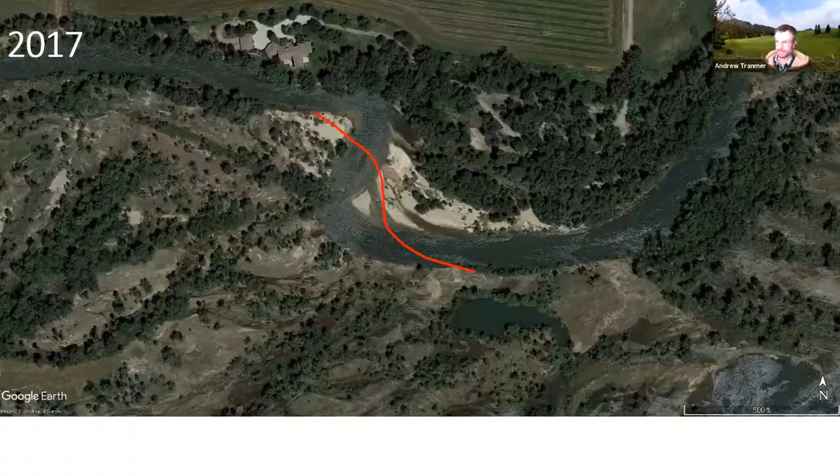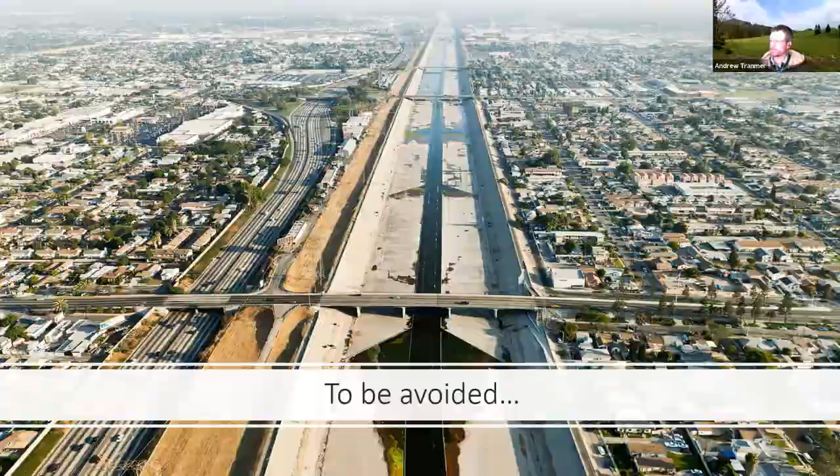And bank erosion is particularly tricky because even though we tend to focus on the negative aspects of it, there's some real benefits that should be acknowledged. And from a negative consequences side, bank erosion tends to damage property and infrastructure, and is all around expensive to avert and or slow down. However, from the benefit side, bank erosion creates these physical disturbances that support both riparian and aquatic habitats. You know, everything from vegetation succession to morphologic change in the channel by creating pools and riffles. So really creating the physical habitat in the channel.

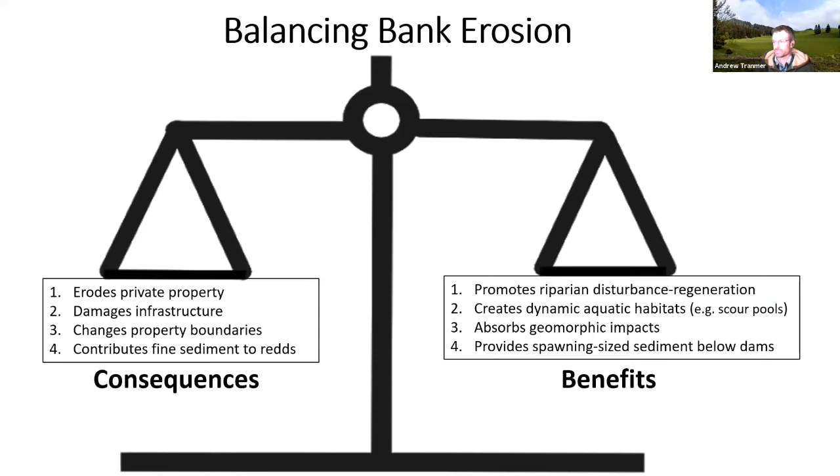And this is particularly important in managed rivers below dams like the Boise that have limited flood disturbances and limited upstream sediment supply from the basin. And a perfect example of this is managing the appropriate sediment size for spawning fish habitat. And in the Boise River, since there's no upstream sediment supply from the basin because of Lucky Peak, this leads to extremely coarse sediment through the Boise and Garden City area.

However, as we go downstream, sediment size tends to decrease owing to sediment input from bank erosion. And for example, we can see here whereby the gravels in Garden City are 350 millimeters and the gravel size in Star are 30 times smaller, on the order of 12 millimeters. And if we acknowledge that the range of salmonid spawning gravels is between 8 and 128 millimeters, that poses real ecological consequences for fish habitat if the river cobbles are simply too large to spawn in.

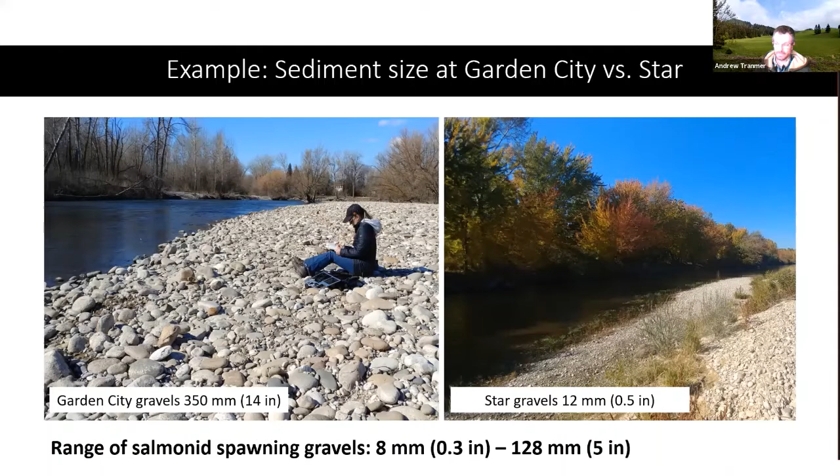So why does bank erosion occur? We tend to see channel irregularities and bends that preferentially push flow to one side of the channel, and that tends to locally increase sediment transport capacity at that particular localized location. And you can see in the schematic, it illustrates how the high velocity core shifts toward the outer bank through the bend. And we tend to see erosion along the outer bank and deposition here along the point bar. And this hydraulic instability really creates the dynamics that we see in the channel.

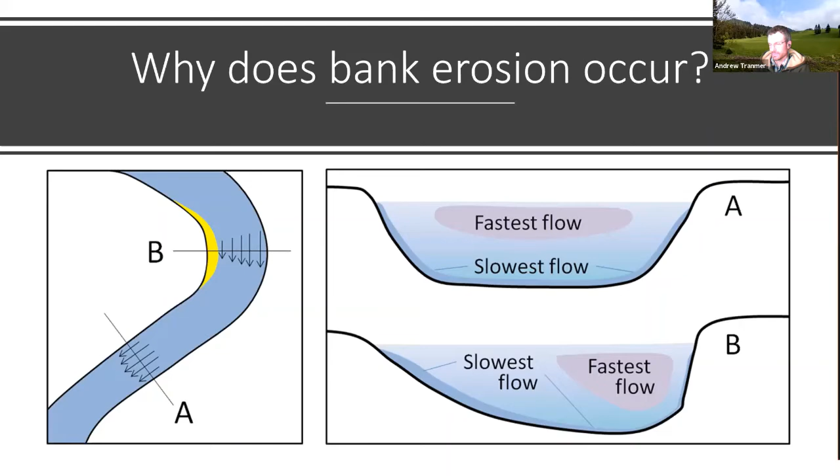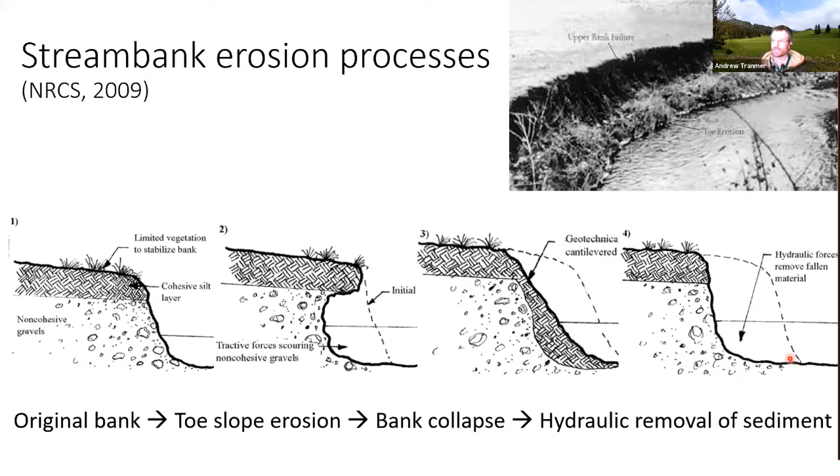And this tends to result in an iterative process seen here during each high water event. We start with an original bank profile here, and we get toe slope erosion and an undercutting that results in eventual bank collapse. And then during the next high water event, you get hydraulic removal of those sediments by sediment transport, which exposes the face again, and you see this process occur once again.

And in the Boise River, the primary erosion mechanism is bank slump. And this is because the stream banks are made primarily of unconsolidated glacial outwash sediments. You can see here it's mixed sand and cobbles. There's localized cohesive clays, but they're pretty spatially limited. And so what we tend to see is these mixed sediment stream banks tend to just slump as the toe is eroded. And as a consequence, you get coarse cobbles that lag behind on the bed, and the sand and fine gravels are moved downstream.

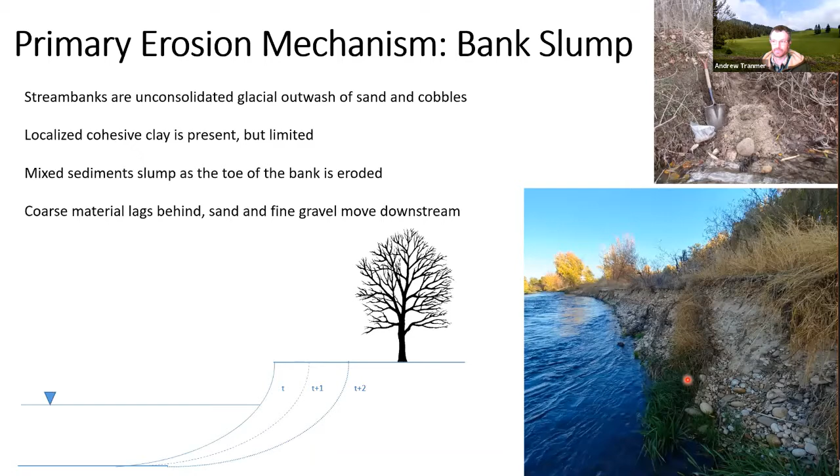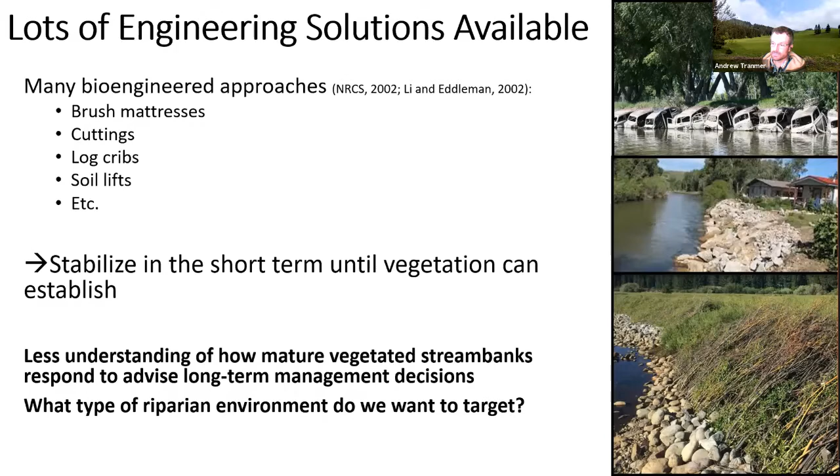But what we're really lacking is an understanding of how mature vegetated stream banks respond to floods to advise long-term management decisions. In other words, what type of riparian environment do we want to target that effectively achieves our goals? Do we want forests? Do we want grasslands? Do we want to encourage erosion in some places and reduce it in others? And so vegetation has many ways it impacts stream bank erosion and those processes.

From a mechanics standpoint, riparian vegetation tends to interact with flow both above and below ground. And so during a flood, when the water goes over bank, vegetation tends to slow velocity in the floodplain and promote sediment deposition. And you can see the resultant deposition here in the floodplain in Garden City, where in and around these vegetation components, you get about a foot of sand that covers these former very coarse cobble bars.

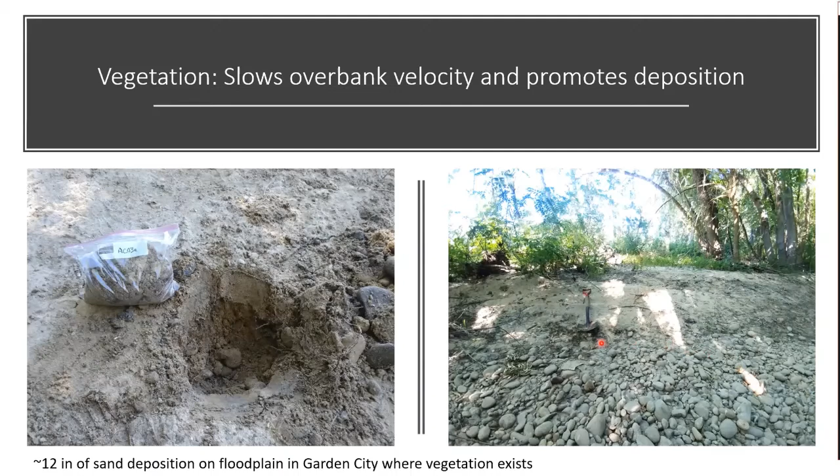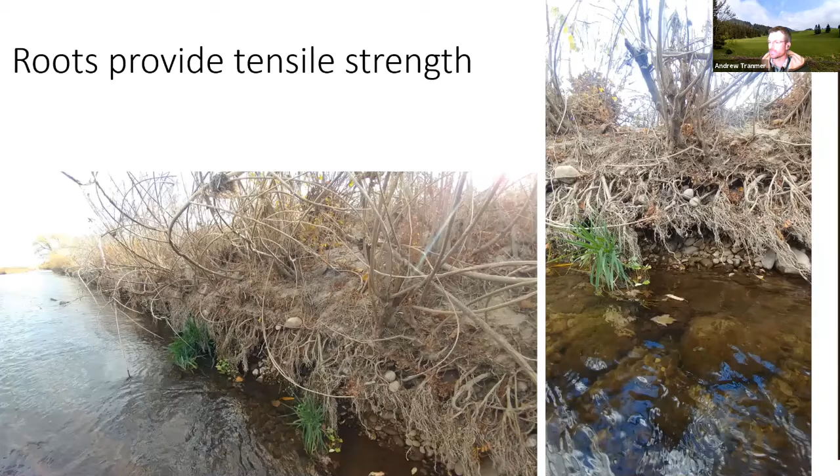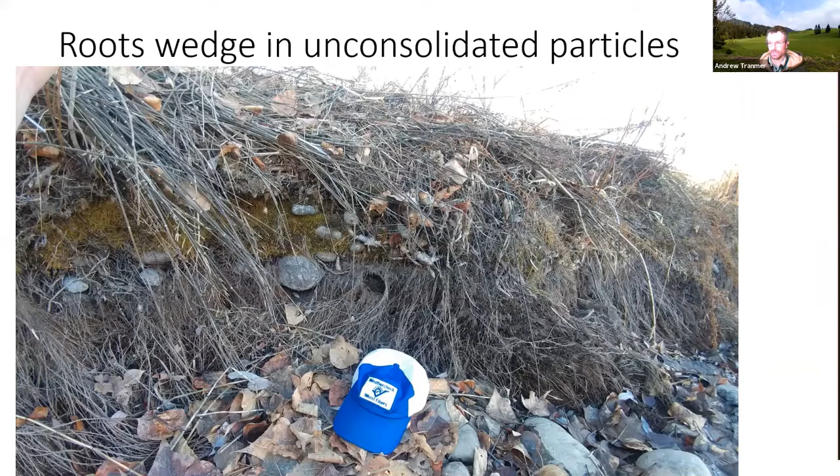Additionally, below ground, roots can increase bank structure by providing tensile strength to the soil matrix, as seen here. Roots can form dense mats that overhang and protect the soil from hydraulic forces, as you can see here. And roots have the additional benefit of wedging in these unconsolidated coarse particles that are tucked up and around here, and it effectively increases the soil cohesion. So all of these act in concert together to reduce bank erosion.

And to understand how these different vegetation types impact bank erosion and channel morphology in the Boise, I took a look at this river segment here outlined in this box that has a general gradient of vegetation, with cottonwoods and silver maples primarily up here through Boise and Garden City, and those transition into sparse grassland and mixed isolated tree species through the middle of this, and then down by Caldwell, there's a greater emphasis of having false indigo shrubs

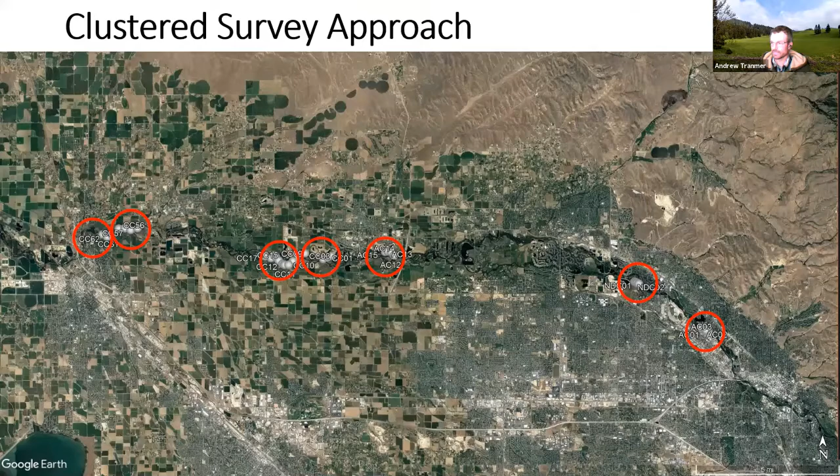along the stream bank. And so I used a clustered survey approach here, whereby I surveyed 48 cross sections in 2017 and 2018 that were previously surveyed in 1998 and 2002, and then were again captured with the green LiDAR survey in 2007. And so here you can see an example of outer bank erosion occurring over time.

The white mark here is the cross section, and this red line here indicates the old left outer bank in 2002. And over here on the right, we have a time series of those survey dates, whereby the gray line here is the survey channel in 2002, and then the orange is 2007, the blue is 2017, and the yellow is 2018. And so over the 20 years, we can see that there is about 160 feet of bank erosion that has occurred, and that was principally driven in high flows during 2012 and 2017.

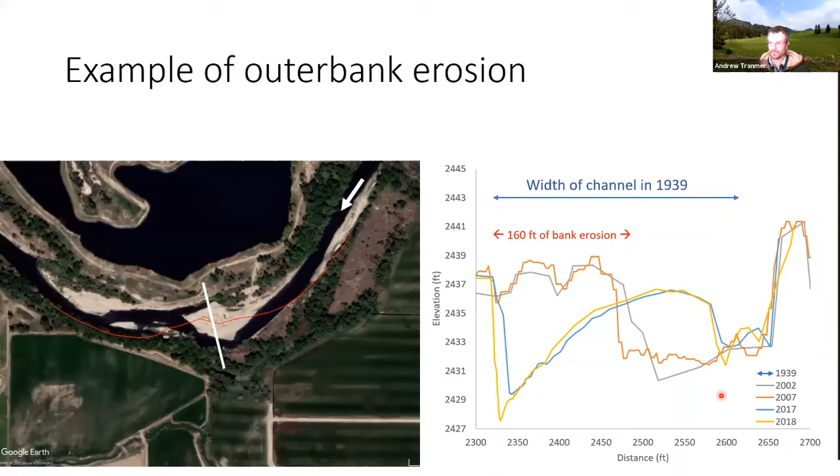And so you can see that the channel tended to migrate to the left bank and the outer bank, and it widened. And an interesting note is that the width is very similar to the width of the channel in 1939, which was very much a disturbance-oriented channel.

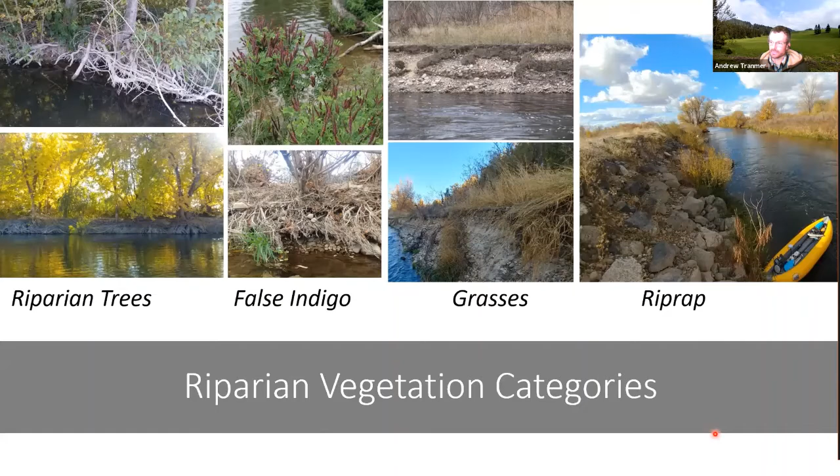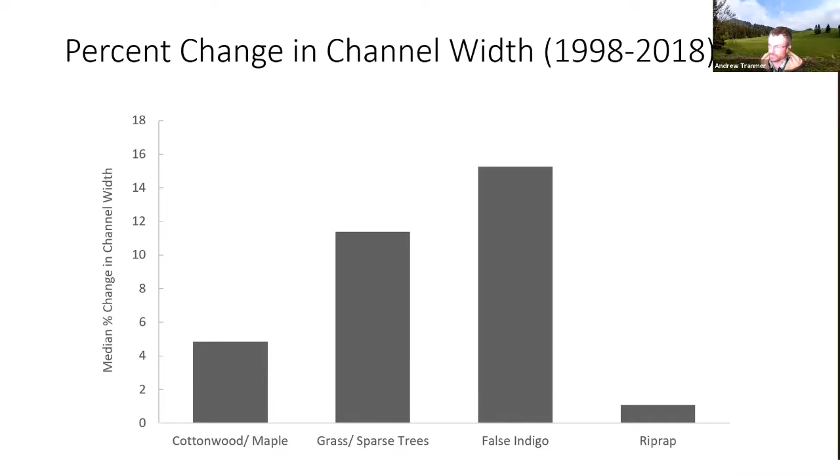However, these empirical results really don't capture the erosional forces in the channel during a flood that may vary by location, right? So I normalized the results by the simulated bankfull velocity from a 1D HEC-RAS model. And while one-dimensional models don't capture the variability in flow at a cross-section, they do provide a first-order estimate of the hydraulic forces in the channel during a bankful event. And so I modeled it at 8,000 CFS.

And unsurprisingly, riprap was still the lowest amount of width change that we saw, but the cottonwood and maple were only about 1.5% change in width, whereby the grass and the false indigo were much higher, about 10 times higher than the riprap. More surprisingly, I found that the grasses and the sparse tree cover were similar to the false indigo here, which can grow in very dense patches. And that was pretty surprising to me. The other surprising finding was that the bank erosion with forest cover was really not that much different from riprap after I normalized it by the bankful velocity.

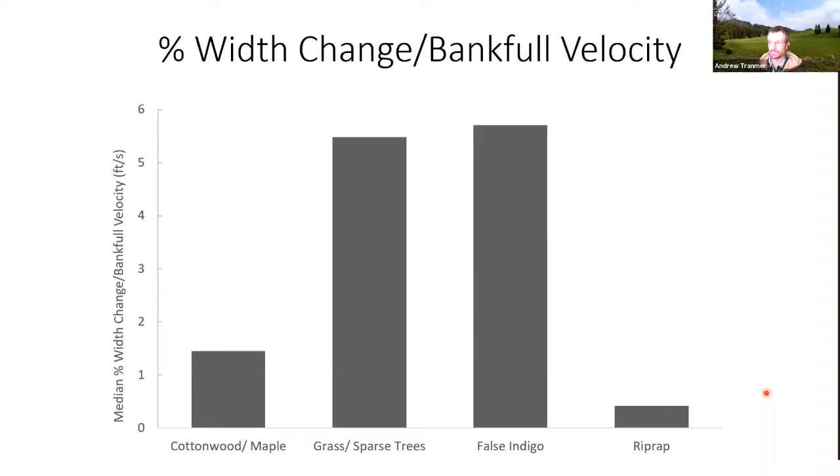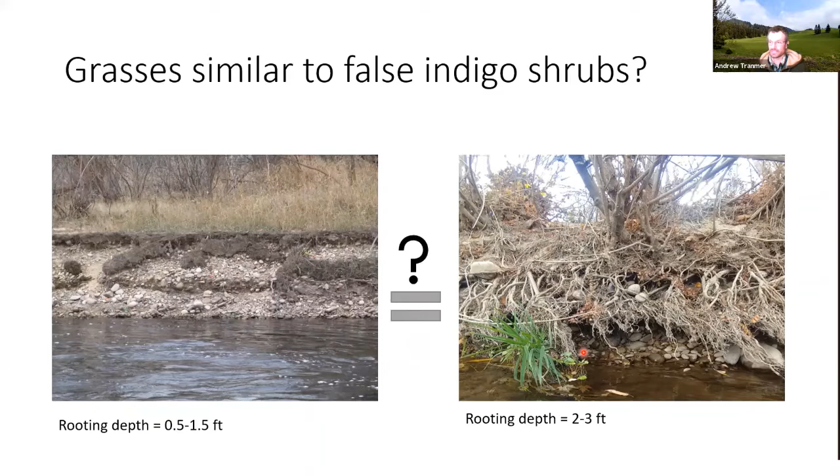And so I would say visually, it's pretty surprising how these two could possibly have similar erosion rates. However, I think it makes a little more sense if we consider the species' rooting depths. Grasses have a rooting depth of about 0.5 to 1.5 feet, whereby false indigo has a rooting depth of 2 to 3 feet. And if we consider the average bank height in the Boise River is about 6 feet, we can see that these shallow rooted species simply don't go to the bottom of the stream bank. And so that toe slope erosion that we were looking at in the schematic earlier occurs effectively below the rooting depth of these, undercuts this vegetation and still allows bank collapse to occur.

In contrast, riparian forest species have a much greater rooting depth of about 10 to 16 feet. And so those roots have the ability to anchor the plant below the scour depth that occurs within the channel. And they have a high inundation tolerance, so those roots don't drown. And that creates this buttressing root system seen in this upper photo that provides that hydraulic sheltering effect to the soil matrix behind it.

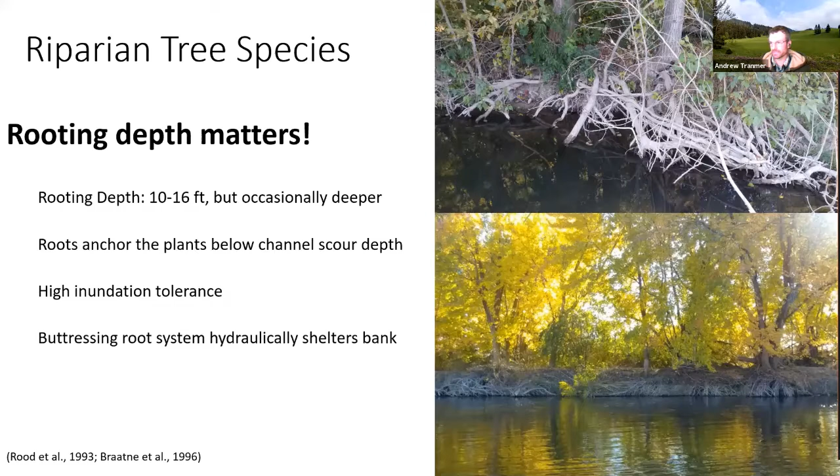And it should be noted that willows were not included in this study simply because they don't have a big presence on the Boise. But from an engineering perspective, we know that willows are definitely the most common restoration plant. And they have a rooting depth of about 3 to 7 feet, dependent upon the species that are being used. And therefore, I have the expectation that they'd probably be less effective than tree species in terms of long-term bank erosion. However, I think the critical point to consider here is that we're really looking at the ratio of rooting depth to local bank height.

And so the message to take home is that we really need to select the appropriate vegetation type to cover the toe of the bank. And so you really want to get this rooting depth over bank height ratio greater than 1. So, for example, if you were to have a 3-foot bank, willows might be a perfect solution for that. But if you have a 10-foot bank that you're trying to deal with, you're going to have to get really creative with the strategy that you use. And so from a more pragmatic standpoint, I'd also say that if you are doing a bank repair project and you're installing willow cuttings, it might be worth your time just to chuck in a couple of cottonwoods for some long-term protection.

And finally, I would say at the larger watershed management scale, the question arises, what do we do with this information? And so I would say, given the efficacy and low cost of riparian trees in reducing bank erosion, the ultimate goal would simply be to protect native riparian forests whenever possible.

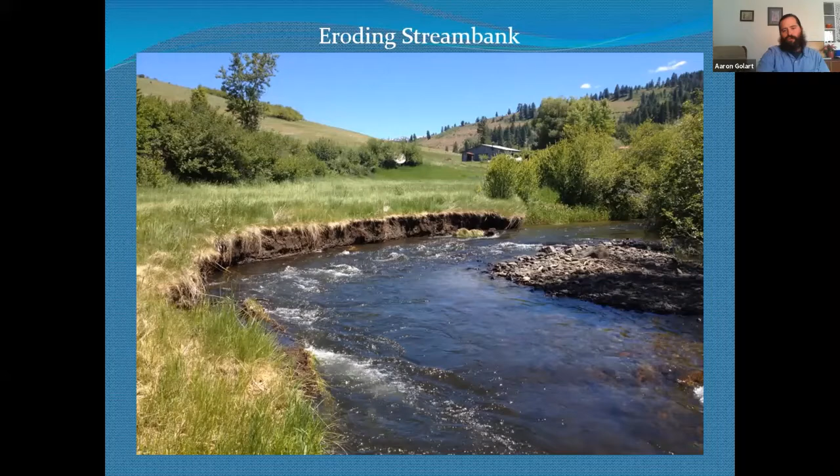And when we're dealing with bank stabilization projects, oftentimes you can deal with habitat loss, and eroding stream banks, that's a natural process. Undercut stream banks provide valuable habitat for aquatic species. And so in these cases where we come in and potentially rock a stream bank that, yes, is eroding, you are seeing a loss of that valuable aquatic habitat.

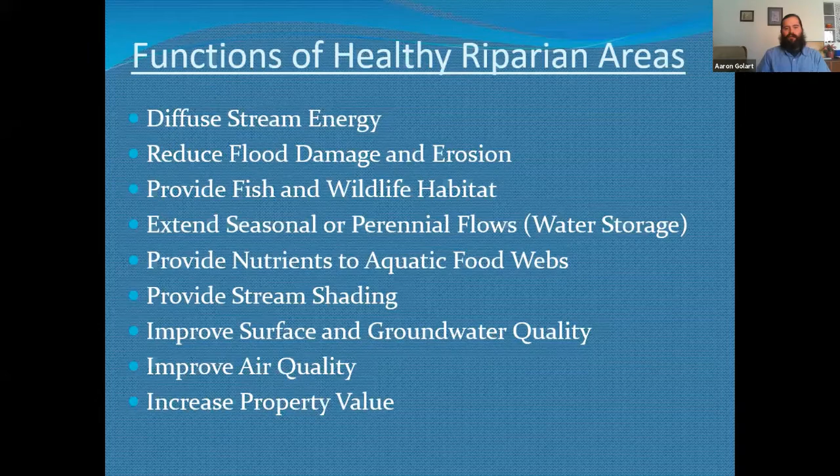So numerous functions of a healthy riparian habitat, but I think in the case of the realm I work in, dealing with erosion and trying to halt it, yet improve habitat, some of the important functions of riparian habitat are diffusing stream energy, reducing flood damage and erosion, and providing fish and wildlife habitat. That's a really important component.

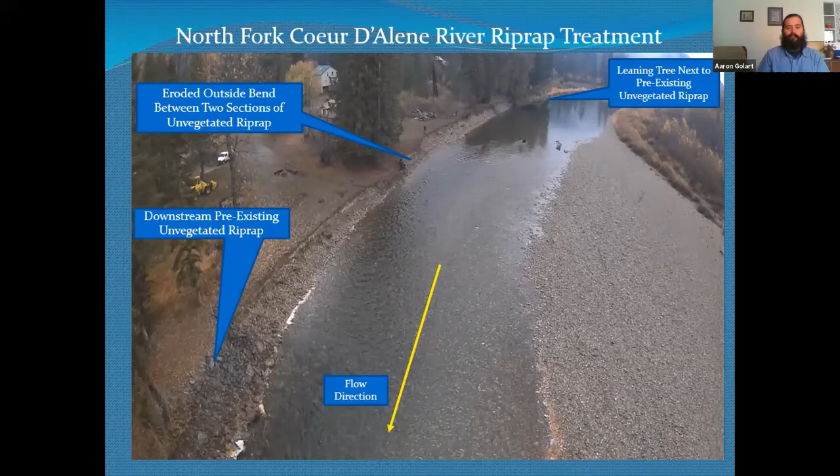So here's my first example. It's on the North Fork of the Coeur d'Alene River. And Andy did touch on this. We have on the upstream end of this project and the downstream end, there is existing riprap. It looks to me like it's pretty much dumped rock riprap, lacks vegetation. So what occurs oftentimes on these outside bends where you have riprap on the upstream and downstream ends is severe erosion in between them. And that's what's occurring here.

Oftentimes the start point and the end point of these riprap jobs, or any bank stabilization project for that matter, would be property boundaries. And so they're pretty arbitrary. They're not necessarily the best starting or ending point for a bank treatment, but you have different philosophies. Some folks have the philosophy, I'm going to leave the stream alone, and other folks want to hold that line. And so these starting and ending points can be pretty arbitrary, and you see the struggles with a treatment ending abruptly, potentially not in the appropriate location, and then downstream or upstream erosion occurring.

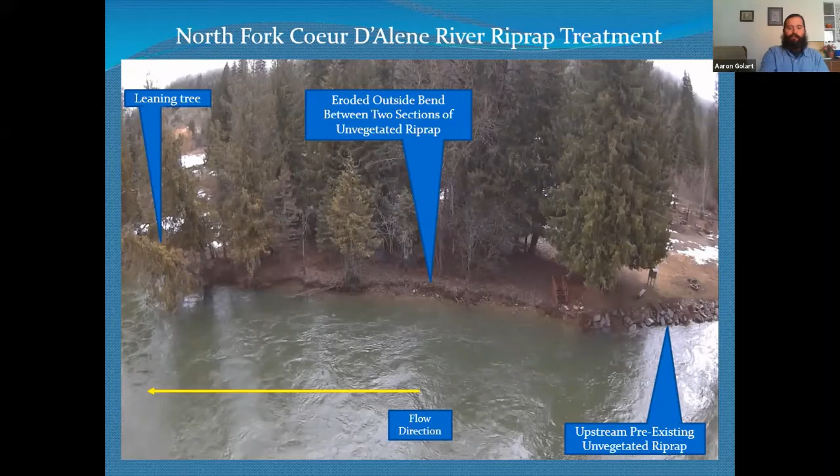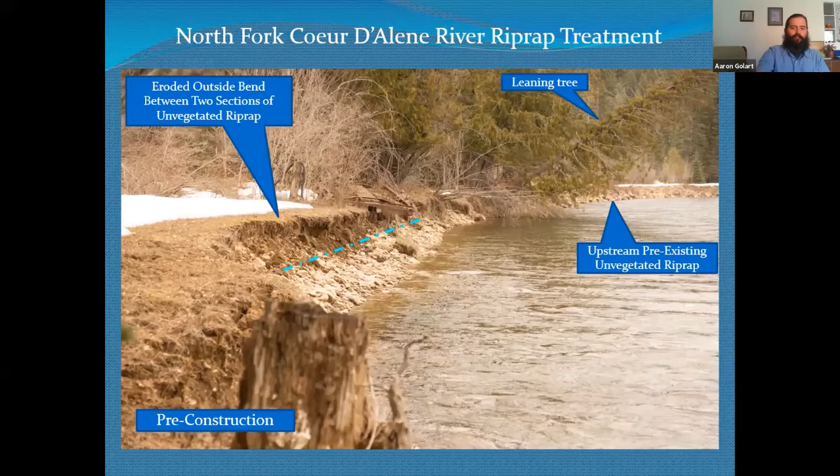Before placing that rock and doing your bank treatment, it's important to slope the bank back, get your willow bundles in, or any other native. Generally it's shrubs, but I think obviously overstory is important, cottonwoods and other species, and then trenching them in vertically as well. So important component. Oftentimes folks will put in the rock and say, I'm going to plant it later. And I strongly discourage that. It's unsuccessful. And it's pretty costly and labor intensive to try and do it afterwards.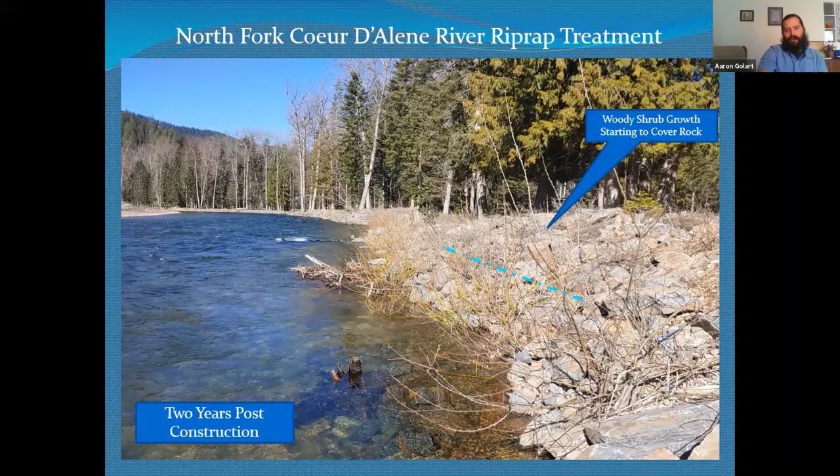And again, the dotted dashed line, I think, will make a little bit more sense here with the next slide, which my thought would be, well, what are the alternatives here? One I would recommend is a very similar treatment, but where the toe rock comes up slope and ends in and around where that ordinary high water would be, or channel forming flow, and then a more gradual slope breaking down that bank in an aggressive planting effort to reestablish that vegetation and again provide as much habitat as you possibly can when dealing with these stream restoration projects.

So again, not to be critical of the original design, but I guess I'm always trying to brainstorm about how we can improve upon projects. And so I see benefit here where during a flood event, you could have flows coming through this vegetated area, slowing velocities, dropping out sediment, and then potentially reducing any adverse downstream impacts compared to just a hardened structure abruptly ending.

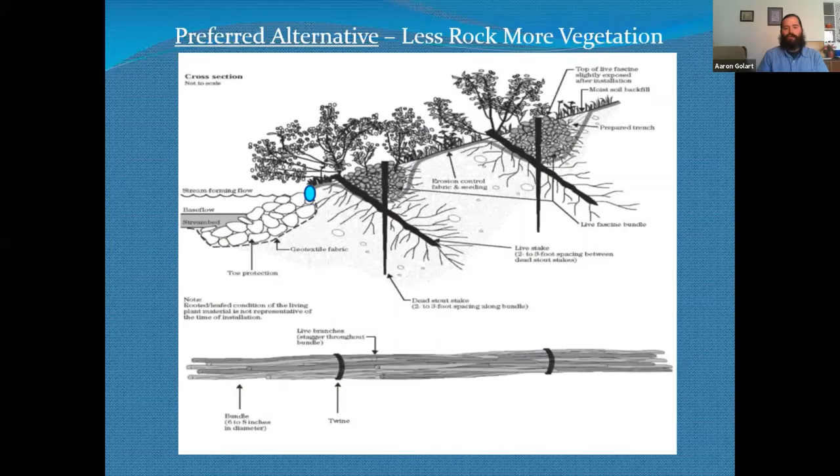So my next example would be the St. Joe River up north. There's a pre-construction photo and post-construction. The erosion effects here are a little bit unusual for a river in the sense that the primary impact is due to boat wakes. And so this erosion is occurring from recreational boating up and down the river.

And so I think that this lower photo shows that it's a unique riprap job in the sense that the substrate size on that rock riprap isn't large at all. It's sized according to the velocities that you'd expect to encounter on that reach of river. And it's about cobble sized and graded with some gravels. The treatment was sloped and planted with native woody vegetation.

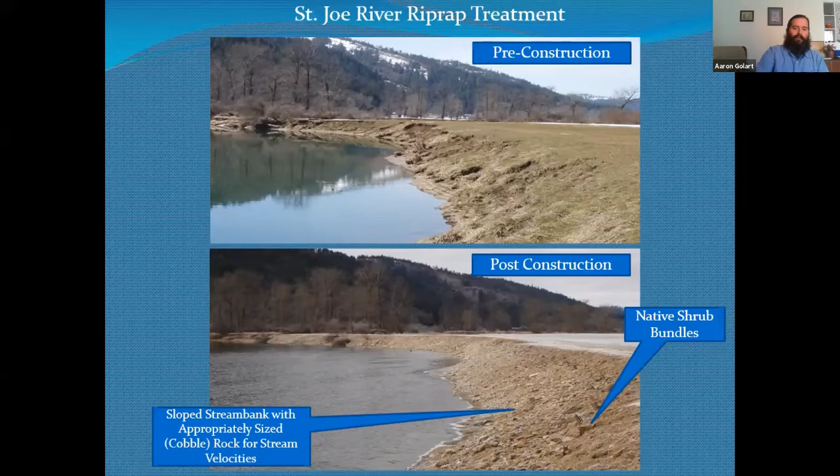So 2 years later, on the upper photo, you see the woody vegetation coming in, some wood racking in that woody vegetation. I don't think that was added as part of the project. There's some racking even on the floodplain there that you see. And then the lower photo is 4 years after construction. So we have good woody species recruitment and sediment falling out. And so overall, I think this looks like a pretty successful project.

Just from my perspective, what would I do to potentially improve upon this is, I think there was potential to add some large woody material in the active channel below the high water mark. But maybe that wasn't practical considering the level of recreational use this river corridor sees. So there's always that perspective that you need to have when considering treatments, that there could be uses that would conflict with that type of treatment.

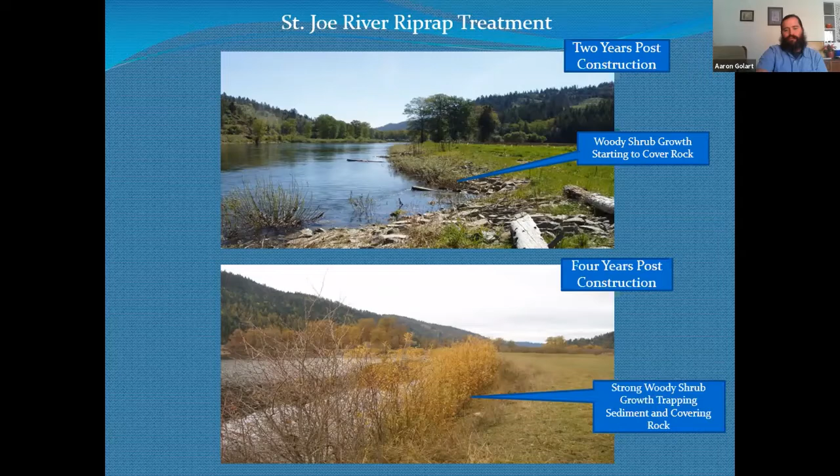So this is onto the Big Wood River. Again, outside meander, eroding pretty badly. A lot of times you need to kind of look at the land management that's occurring adjacent to the river. And in this case, you have irrigated landscape with no riparian vegetation immediately adjacent to the stream channel.

And so I often see this, whether it's in agricultural operations or urban. This similar example where folks are just watering their lawn. We see it all up and down the Boise, where you'll have active erosion from the river itself during high flows, but actually also erosion occurring from backslope resulting from over irrigation and saturated soils.

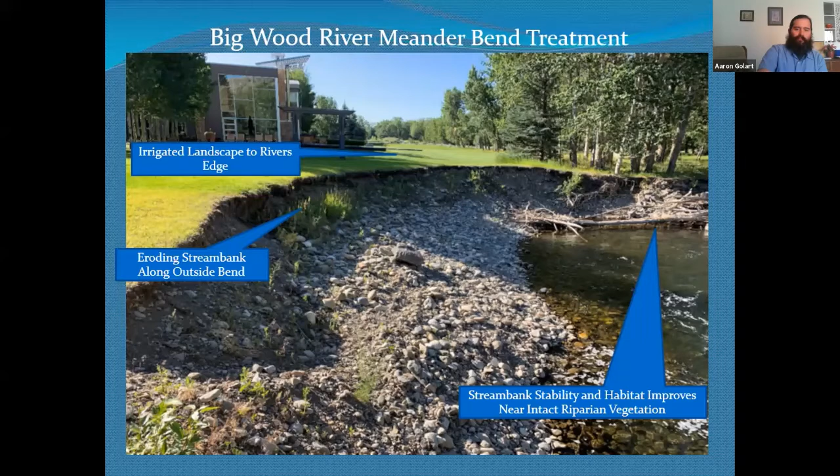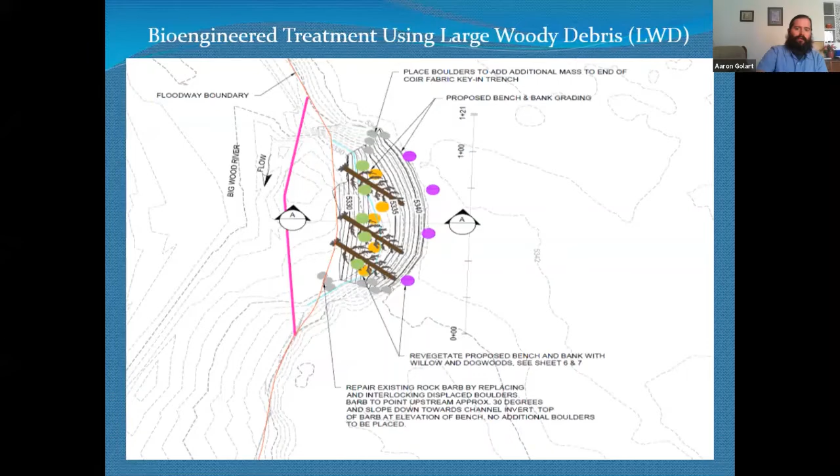This is a similar example, larger in scale, on the Yankee Fork of the Salmon River. Again, outside bend, point bar, pressing on this. This is addressing some bank erosion, but there are other historical issues up on the Yankee Fork. If you're familiar with it, it was historically dredged, and so this is a large-scale restoration effort. But I thought this was an interesting similar treatment, just larger in scale.

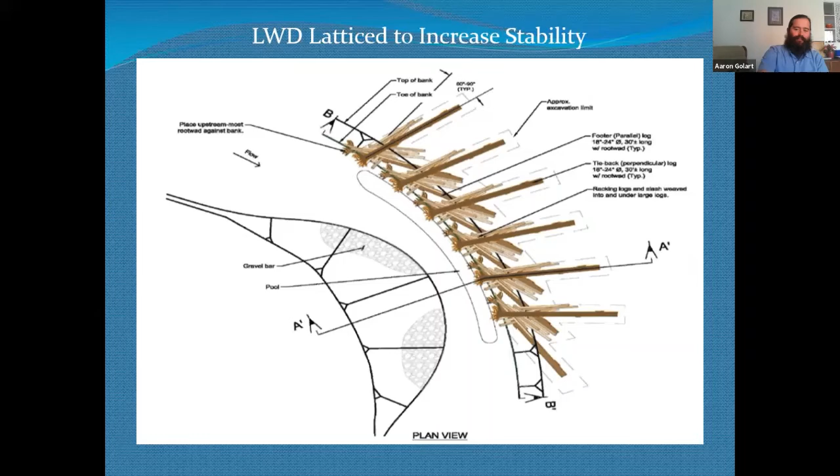This is the plan view of that treatment. You can see how they rack the wood in there, they lattice it or stack it in all directions, some parallel to flow, some perpendicular, some pointed at a 45-degree angle. I always chuckle a little bit when you look at these great diagrams and then out on the ground you might think it looks sloppy. It looks natural, obviously, but it's interesting to see that perspective in the before and after, at least relating to the diagrams. This is a cross-section diagram, pretty straightforward.

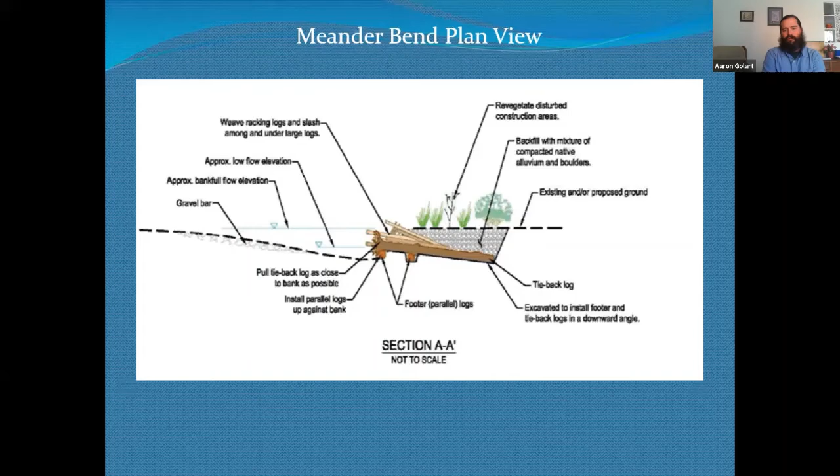I did want to make note, it's hard to see on the plan view diagram, an important component would be getting your footer logs or even rock keyed in below the initial wood placement, and ultimately that should be below scour depth so that you can secure your structure and help prevent it from undermining. Some undermining is obviously good for fish, but you don't want to undermine your whole structure to potentially cause it to fail. And then you can see that the floodplain bench, so to speak, is revegetated with your native riparian species.

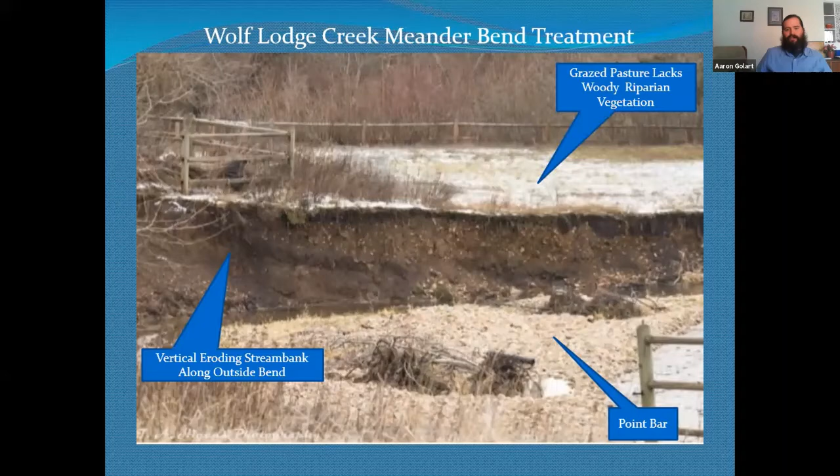My typical response to that would be, yeah, I would tend to agree that you could have some foundational damage or annual flooding that may occur close to that structure, but this type of treatment would reduce the potential, in my opinion, for a catastrophic event, channel avulsion, something, the channel continuing to downcut and potentially getting underneath that structure and completely washing it away. So it's a balancing act. Are you willing to get your feet wet periodically, or risk a potential for a catastrophic type event?

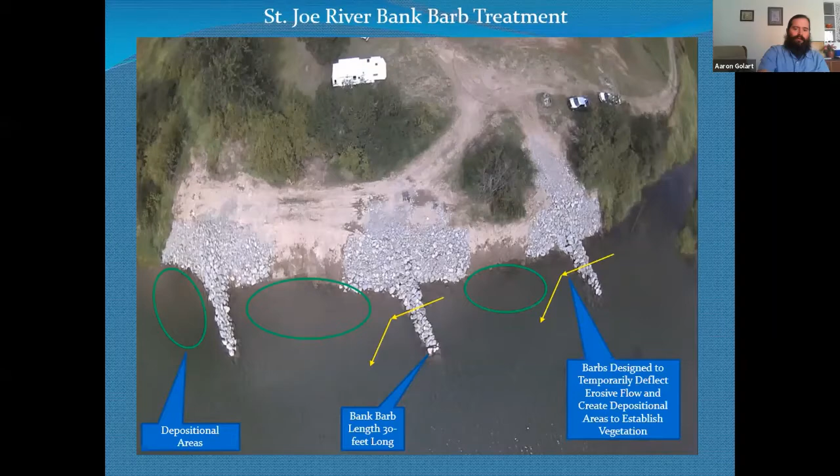But in this case, I generally recommend that people construct barbs so that they are overtopping during low flow, just a little bit over the top. You don't see them exposed similar to this, but again, all these projects I think were well constructed. So briefly, barbs are designed to have flow come over the top and deflect at about a 45-degree angle away from the bank you're trying to protect, and then create an area where sediment can deposit and then in theory revegetate. And so that's the objective here, to allow this area to kind of reheal itself. So after some regrading and seeding, the rock that's up on that bank isn't as obvious. So right here, this is immediately after construction.

What could be improved upon potentially? You know, I had my bias, my background's in fish and stream ecology, so I like wood and potentially woody log jam deflectors used with or instead of the large bank barbs or groins. They certainly are going to provide good quality aquatic habitat, and I think if constructed properly, you can accomplish the same purpose or the same result as using the rock bank barbs.

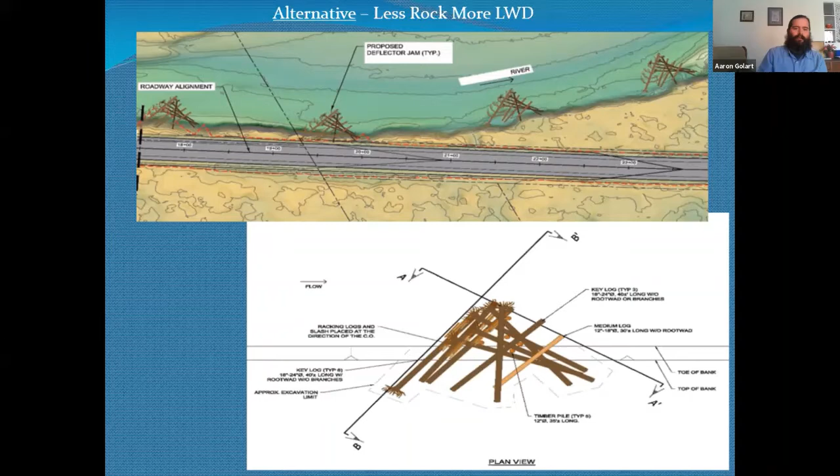Certainly a landowner could decide that they want to place rock in this area. This is a spring creek in the Teton Basin, but then you would just have foreign material in an area that would have been overkill, so to speak, where these softer treatments, which can be much cheaper, are a little bit more labor intensive potentially because they're a lot of handwork, but you'll find a lot of success, and then you don't have a bank treatment that's just kind of a foreign treatment in a certain watershed or drainage.

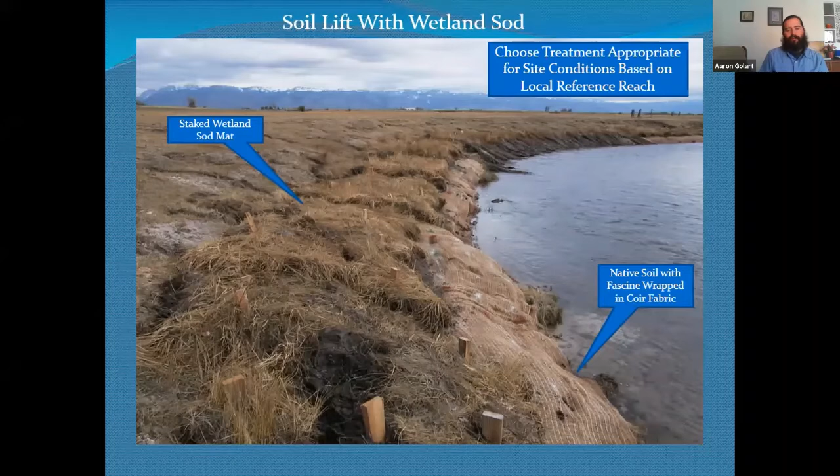That's all I got. Thank you so much, Aaron. Those were some really interesting examples. It was really cool to see the variety of approaches, and particularly that last one in the St. Joe, seeing 8 years later, and also thinking about what alternative mechanisms are to get similar results.